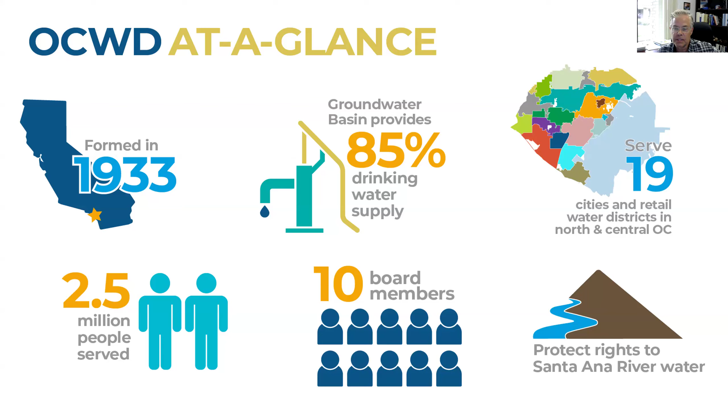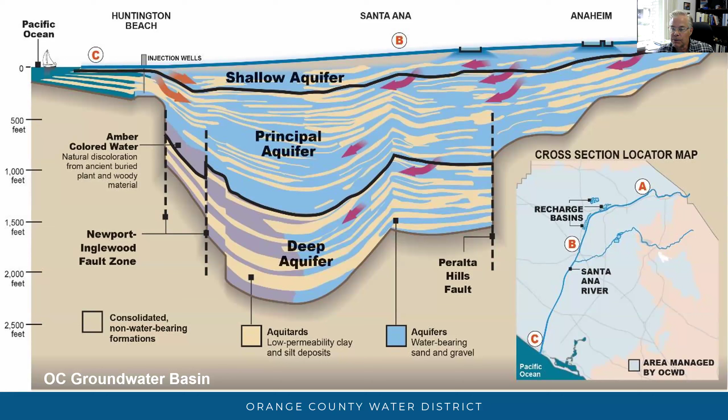We're blessed to have a huge underground aquifer in Orange County. It holds about 66 million acre-feet, but obviously we can't use all of that water. So we only use about 500,000 of that 66 million, and that's our operating range. We try and keep the groundwater basin relatively full in that range to avoid subsidence or seawater intrusion. It's just a big layer cake alluvial aquifer that you see in many places in California.

So a little bit about our infrastructure here in Orange County. At the far upper right, you see Prado Dam, a U.S. Army Corps of Engineers dam built in 1941. That's important for stormwater capture, and that stormwater is released downstream to our recharge basins, located in Anaheim, adjacent to the Santa Ana River, and in the river itself as well.

And then down toward the coast, we have our seawater intrusion barriers, two of them. The Talbert barrier is supplied with recycled water, 100% recycled water. That recycled water is also pumped up the red line, the pipeline that takes it up to our Anaheim recharge basin. So a very important source of water for us now.

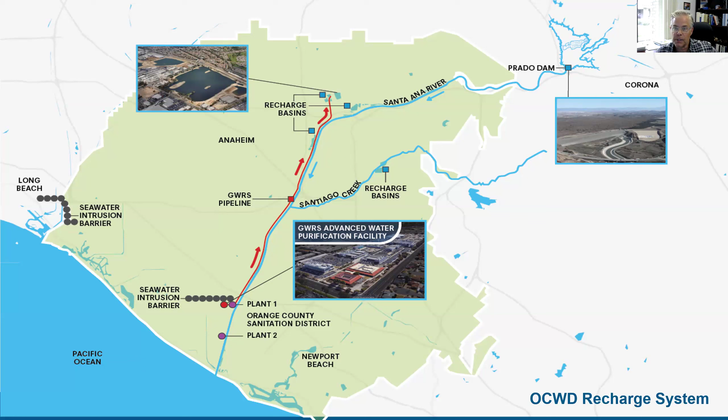So kind of drilling into our facilities up in Anaheim, we have 1,500 acres of land. We could not afford to buy this land today if we tried. That land was $27 an acre back in 1936, and now it's about $2 million an acre today. So we're really fortunate we started early.

And so we have more than 24 different facilities. What I want to draw your attention to in this graphic is that you can put our facilities into three different buckets. One bucket is surface water flow facilities where the water is constantly flowing, shaded in blue. That includes the main Santa Ana River and off-river channel basins. Then we have the green Santiago Basin and Burris, former gravel pits, which primarily just recharge water when they're full and not when they're empty.

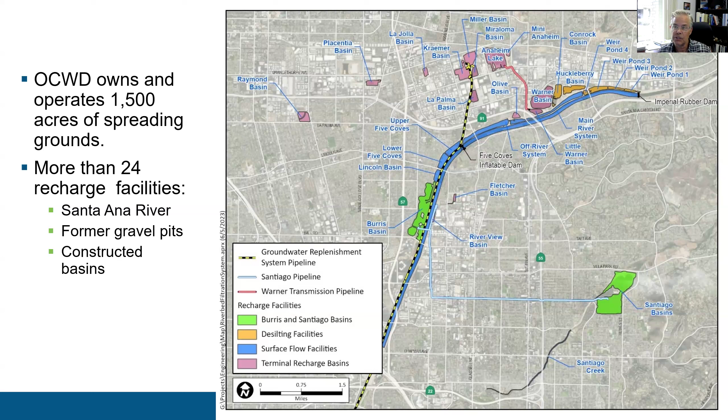So they're a different animal compared to the purple, which is really the focus of our talk today - what we call the terminal recharge basins. These basins are your typical recharge basin where the water comes in and then it just sits. And because the water sits, all the suspended sediment and solids in the water settle out on the bottom and clog. So these are really the facilities most prone to clogging, and of most interest in the study I'm presenting today.

So we have a pretty diverse water supply. As I mentioned, GWRS, the recycled water, is now our largest component of recharge to the groundwater basin. That's beautiful because 365 days a year, every day, we're getting that water in the ground. The base flow coming down the river is pretty consistent, natural recharge is consistent, but the storm flow is really the wild card. With changing weather patterns and everything, it's so important to make sure we can capture all that storm flow coming our way and not lose any of it to the ocean.

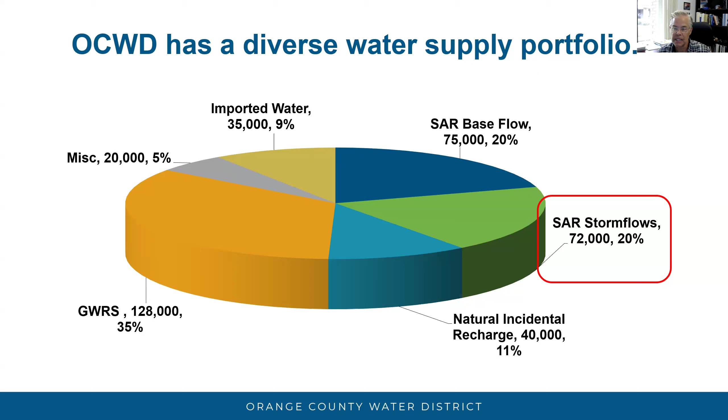So why are we doing this study? Well, all recharge facilities clog - that's a universal golden rule when it comes to MAR. It's all going to clog at some point, so you need to be ready for that or have steps to deal with it. For us, because we're adjacent to the Santa Ana River, we get a lot of suspended sediment that we bring into our system, tons per year, every year. It's really a key constraint on our ability to recharge water. And as I mentioned, land is $2 million an acre, so we want to make sure we can get the most out of every acre we have. That's really what's driving the research we're doing on clogging - can we increase our recharge capacity by reducing clogging?

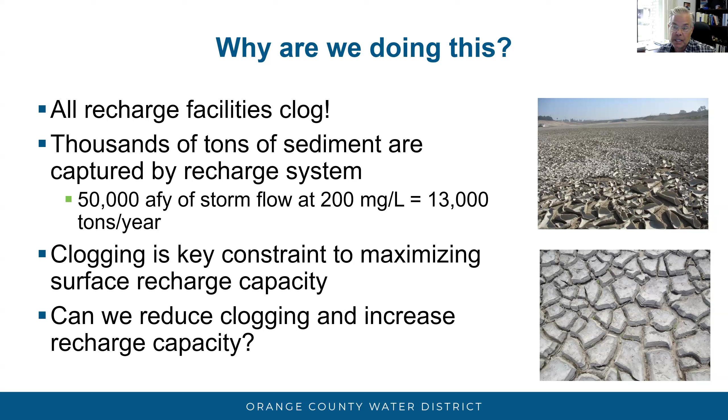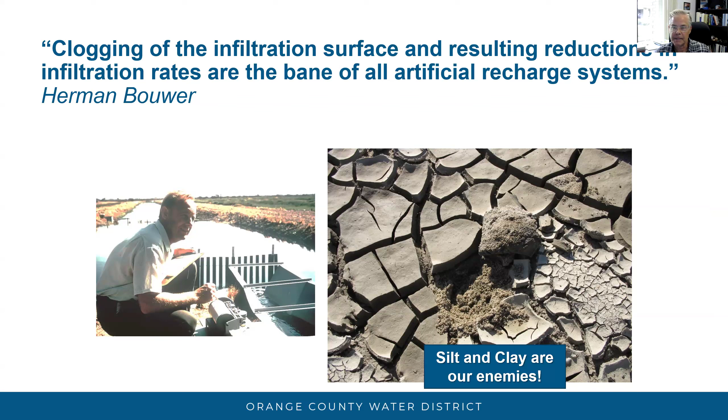That really drove the point home of how clogging is impacting this basin. If we can somehow clean up the river water and reduce the clogging potential of that source of water, we could potentially double the amount of water we can get into the ground. So that's a big driver for us to do this work and find out how we can do that.

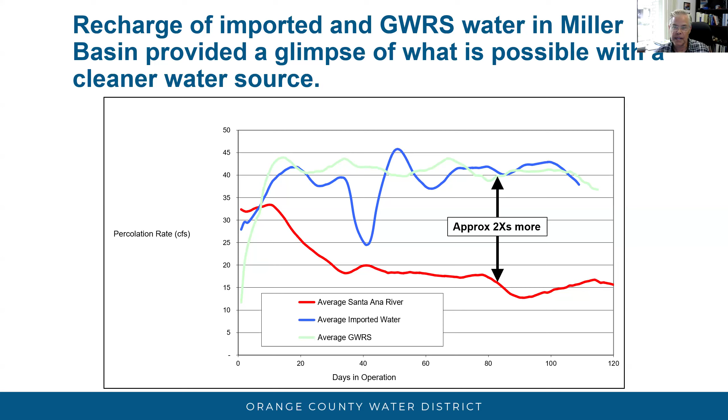What we found was really interesting and surprised the engineering community: any method that used a polymer, flocculant, or chemical pre-treatment to reduce the sediment load and get the sediment to drop out, even though it created water with low turbidity, once introduced into the concrete test cells, ended up clogging. We suspected that's because of carryover of chemicals, which started interacting with the native fine-grained materials in the sediment and created clogging.

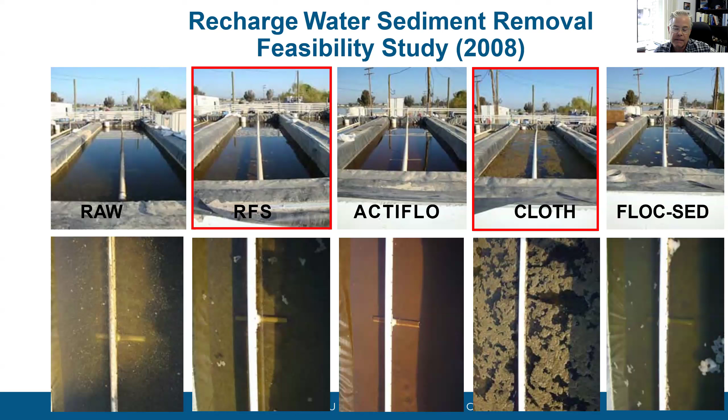But the two methods that did not cause clogging like that were riverbed filtration, or RFS, and cloth filtration, because we were able to use those two methods without any chemical pretreatment—just purely mechanical filtration with no chemical addition. That did result in increased percolation rates over the baseline. That was an important finding of this study, and I think it's really important to keep in mind as you look at strategies to reduce suspended sediments in your source water.

The cloth filtration we did on a small recharge basin for several years, and it was able to remove suspended solids, but the capacity of the cloth filter to remove sediment loads is pretty limited, in a finite range. So it didn't turn out to be very suitable for high levels of TSS—not really very useful in the broader scale in our system, not something we could scale up in a cost-effective manner. So we shut that system down and got rid of it.

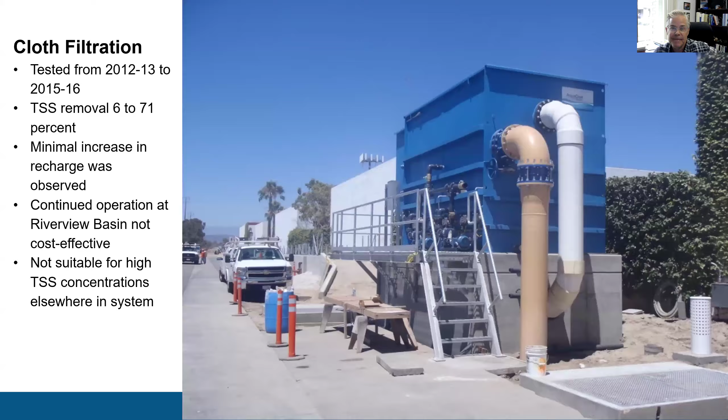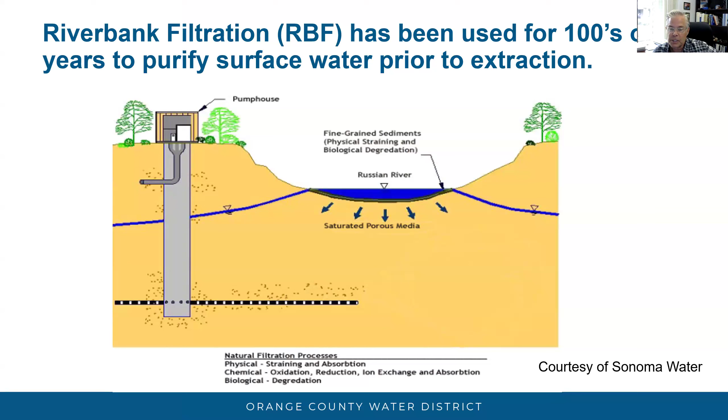So getting to what we're talking about today, riverbank filtration is kind of what we're doing, in a slightly different way. This technology has been used for years in Europe and all parts of the country. This graphic here is from Sonoma Water up on the Russian River—they have 9 of these riverbank filtration wells that they use for treating their water prior to use.

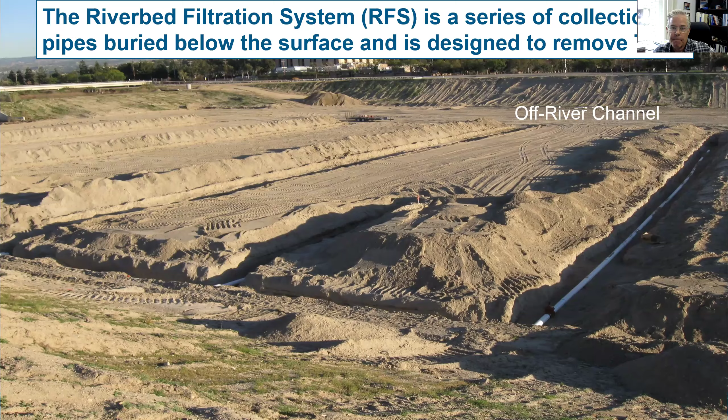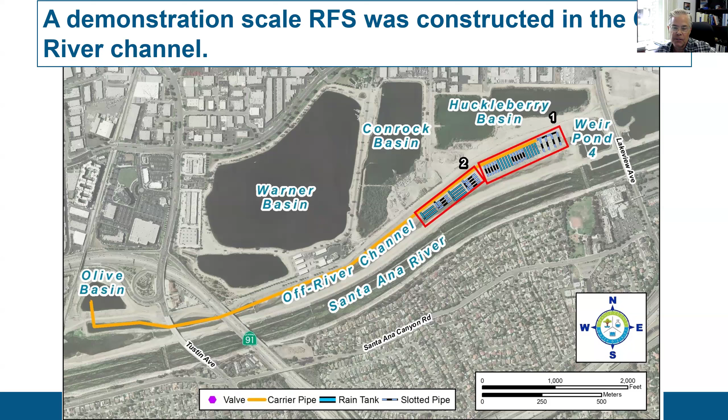The pilot system we built was expanded to a full-scale demonstration project. What you see in the red boxes are two sets of laterals that we built—I'll give you a more detailed graphic of that. These laterals cover about 10 acres and go into a dedicated supply pipeline, that orange pipeline, and then that water is conveyed to a downstream recharge basin called Olive Basin, which only gets filtered water from this project. This is the project we've been working on for about 8 years, testing it in all kinds of different configurations and modes to assess its long-term performance.

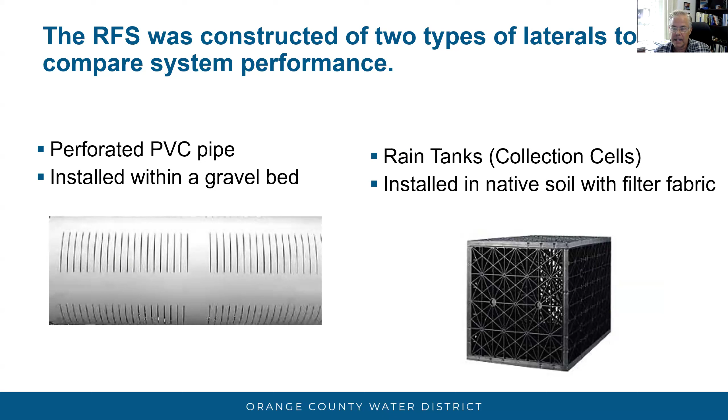As I mentioned, we used PVC pipe for the pilot, but we also used a different style of construction for the demonstration project called rain tanks. These are made by Atlantis. They're used a lot in the flood stormwater capture industry, underneath parking lots and other ways to capture stormwater. So we installed these to see if that would also provide a benefit in comparison to the PVC pipe.

Here's a picture of the rain tank being installed. You put them together, they're like Legos. You snap them together and then you wrap the geotextile fabric around them. They just serve as a conduit for water, just like the PVC pipe does.

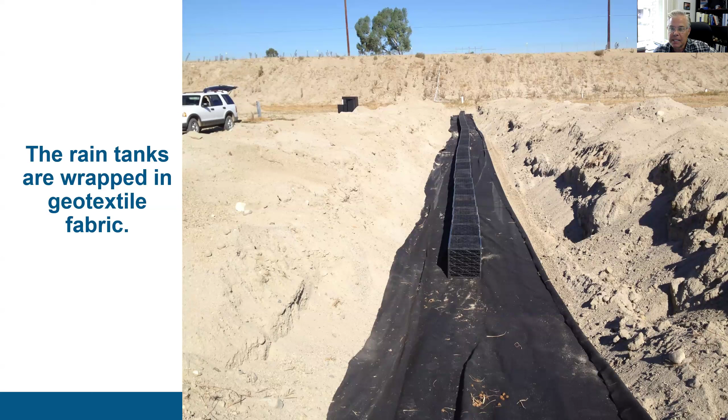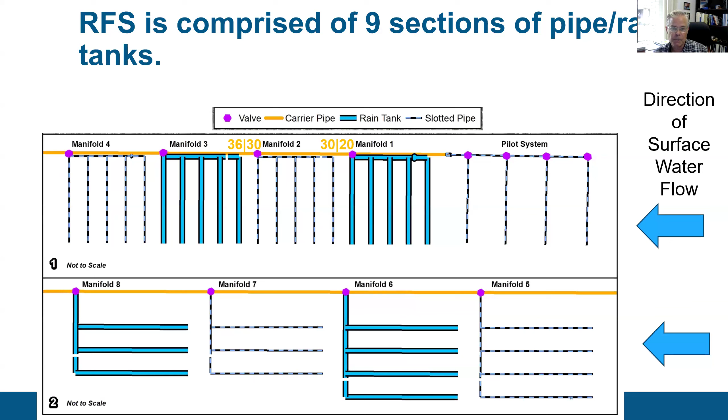We put together these series of manifolds with alternating types of material, the PVC pipe or the rain tank. We also looked at the orientation of these tanks to flow—does it make a difference if they're perpendicular to flow or parallel to flow? We were just trying to look at all the different perturbations we could make to assess future design parameters for this type of project.

I mentioned this filtered water was then fed into Olive Basin, and we also constructed a monitoring well near Olive to look at the water quality impacts of the water after it's already been filtered once. Do you see additional changes in water quality after it's recharged again?

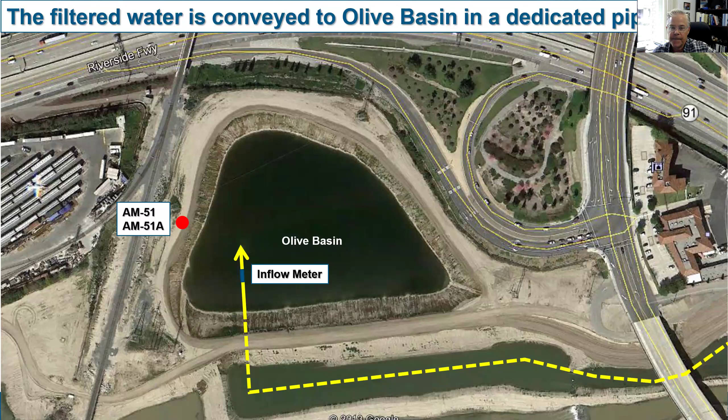So let's talk about the results. We've been testing for over 8 years, with a lot of performance and water quality testing we can present here today. I'm not going to go into the gory details, but just some of the highlights.

Olive Basin performed well from 2015 to 2023. I want to draw your attention to the bottom line, the percolation rate over time. Because of where the system is situated in our recharge system, it primarily receives floodwater, so it's mostly active in the wintertime. In the summertime, when we're down to base flows in the river, we're not able to supply water to the system. So it's somewhat erratic, which made interpretation of the results a little more challenging, but not impossible. That's why you see so much spikiness in the data, because of the supply constraints to the basin.

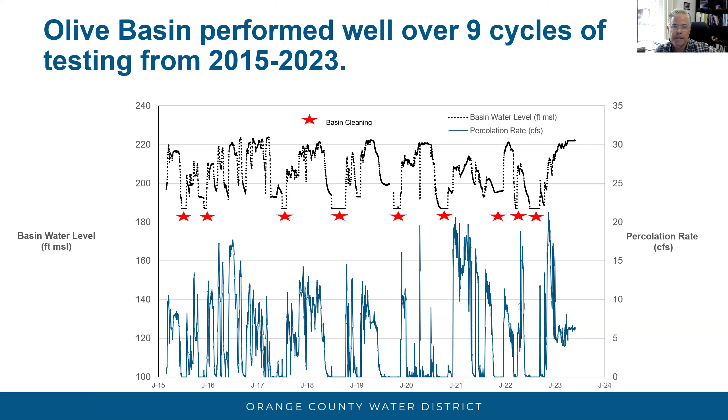Before I get into performance, other water quality improvements we saw were TOC and DOC removal of 50%, which is pretty consistent with the literature on soil aquifer treatment. What's really fascinating is you're talking about very quick travel time through the soil, on the order of 3 to 4 feet per day. So you can see that organics removal in MAR is very effective, despite the short travel time here.

Some of the CECs we saw removed showed a pretty typical removal pattern—some removed, some not removed. If you want more on that, you can read the final report, which I'll give you a link to at the end of this presentation.

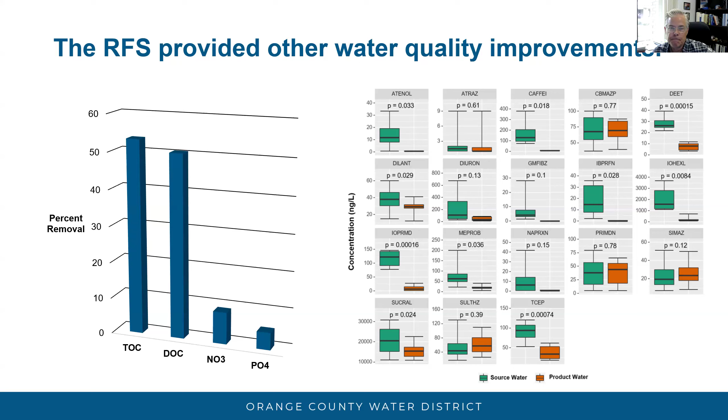So what did we get out of this? The red line on this graphic is the performance of Olive Basin with unfiltered river water—that's what it would do typically on average. You can see it would fill up and clog pretty quickly, just like Miller Basin that I showed you earlier. All those other lines are the riverbed filtration percolation rates over time, and you can see we got much higher rates, up in the 20 CFS range. For a long period of time, we can go a year between cleanings, whereas with unfiltered water, you'd have to clean it after just 3 or 4 months of operation.

So how do we interpret these data? What I did was take a graphic and said, okay, over a 500-day period, how many times would I have to clean the basin using unfiltered water? That's the red line you see there, showing the river water cleaning period—there are 4 cycles of operation shown with unfiltered river water. Then I took the long period of time we had for several of the runs and tried to project what the clogging would have been if we'd had a constant supply of water to the basin for that time period. That's what the dashed line shows you.

If you look at the volume under the curve, the red dashed line, that's what's in the box in the upper left corner. With unfiltered river water, you're getting about 5,500 acre-feet over that time period. With riverbed filtration, based on the projection, you're getting more than double that volume. This matches up really well with what we saw in Miller Basin on that slide I showed you earlier. It's nice to see a repeat of that doubling of recharge capacity using a different source of water in a different basin, and it gives us a lot of confidence that this is a real benefit achievable on a bigger scale.

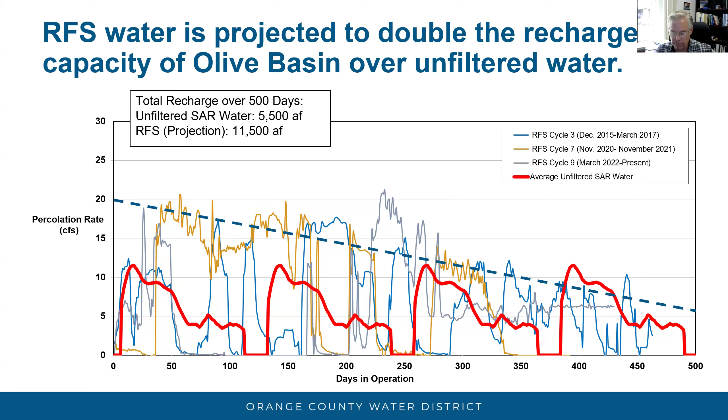Just some other performance metrics I wanted to mention: we did not see any difference between the slotted PVC pipe versus the rain tank in terms of volume or performance over time, so it's really a wash. The orientation of the lateral didn't make any difference, whether parallel or perpendicular to flow. We also did not see any long-term performance decline. Some people were concerned that suspended sediments might get bound up in the riverbed sediment and not get cleaned or washed away, but because there's always surface flow going over the top, the surface stayed pretty clean.

We did notice a decline in per-lateral performance when all laterals were open. That meant some laterals were too close together, and when everything is open, you start to cannibalize the performance of the nearby laterals. So spacing turned out to be pretty important. You can put them too close together and still get the same overall flow rate, but per-lateral performance suffers. There's probably some optimization that could be done to make sure laterals are spaced at the right distance apart so you're not overbuilding the system.

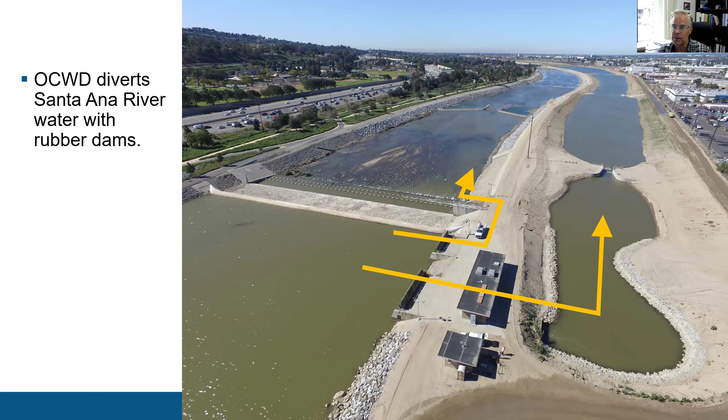I show you this because the big idea is to divert water in a different way. This graphic shows what we're currently doing: Santa Ana River water comes down, we've got a rubber dam, we stop the flow, and divert it to recharge basins or back into the river downstream. That's our current operation.

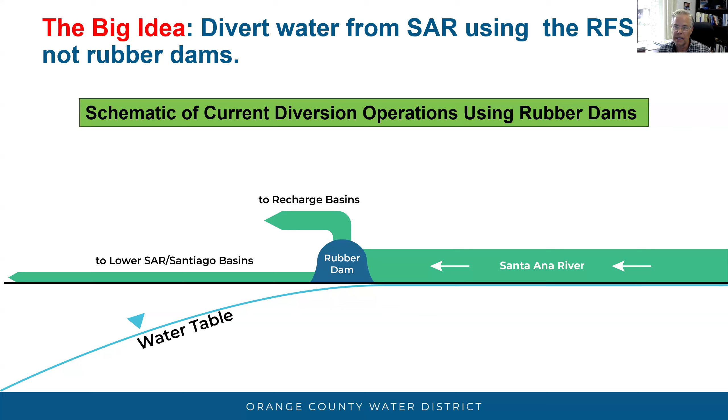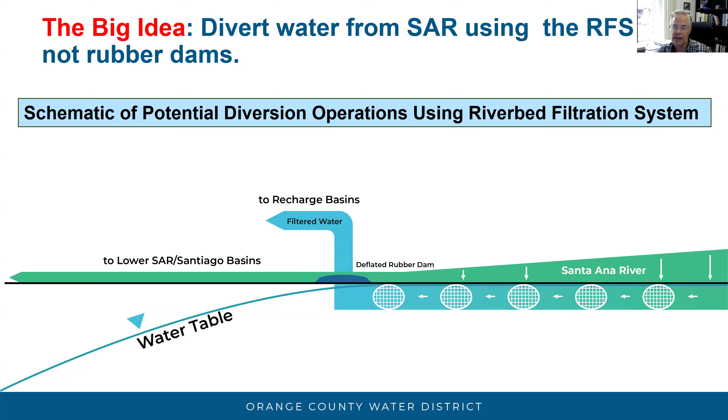The vision of using riverbed filtration is to put the riverbed filtration system under the river and divert the filtered water off the river, leaving the unfiltered water in the river to go downstream. So rather than diverting on top above, you're diverting below. By doing that, you take advantage of the filtration properties of the riverbed and that filtered water, increasing your recharge capacity. That's the big idea—hopefully that graphic simplifies the concept.

One thing we have to consider in our case is that we have a pipeline connecting these offstream basins to the river, called the Warner Transmission Pipeline. Right now that pipeline's capacity is fine, but if we purify the water and make it cleaner, there's going to be greater downstream capacity than currently exists, so we may need to look at potentially upsizing that pipeline to account for the cleaner water we might have in the future.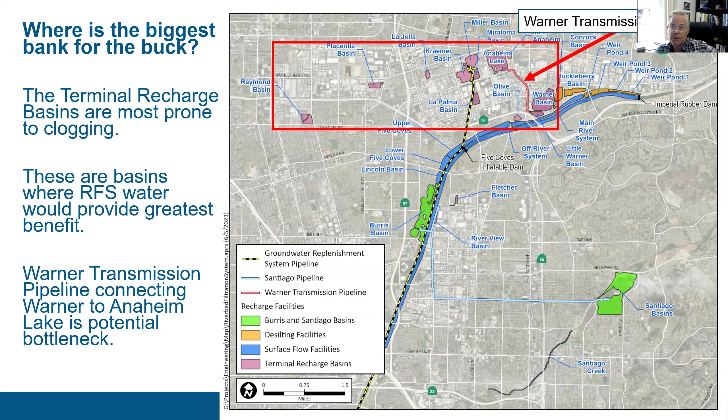So here's the picture of the recharge basin, Terminal 1, the Anaheim Lake, Miller, Kraemer. These are the basins that we're targeting for this riverbed filtration system.

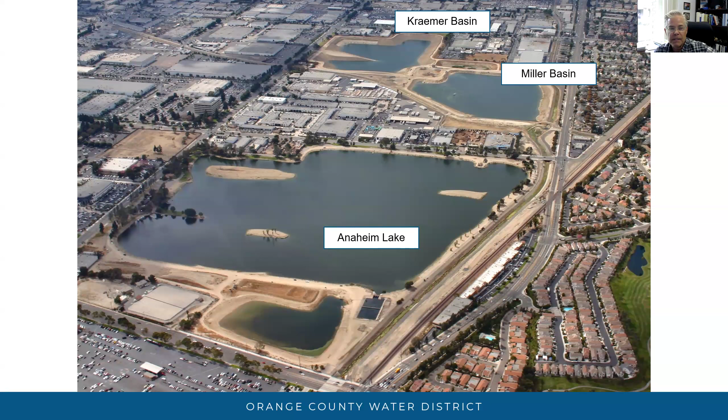Now, to analyze the potential yield we might get, we used a recharge facilities model that was developed in 2009 using GoldSim software. It's a really great model, great tool that we've used for a lot of planning exercises over the years. And the secret sauce behind this model is it includes a percolation decay equation that we've developed for our facilities based on a lot of research that we've done.

So every basin in the model has its own percolation decay equation. Some of them are similar, but some are unique and calibrated to that particular basin. And that's really what makes the model work. We're able to calibrate the model because we have those equations built in. So very useful, very handy, but really important to account for clogging if it's going to be an accurate model.

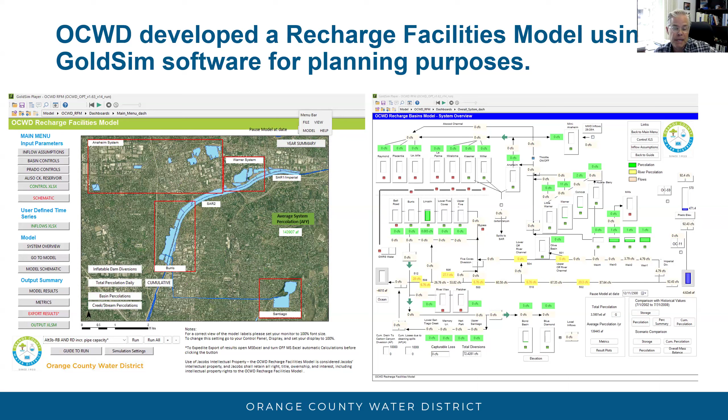So using this model, we said, okay, what if we had no clogging in those downstream basins? What could we get out of it? And this is what we came up with.

If you see the graphic there is the total annual recharge with no riverbed, that's the baseline. And then if you put in the riverbed filtration, and then riverbed filtration with increasing the Warner transmission pipeline diameter or capacity. The one on the right is really the more interesting one. That's the average annual increase that you would get from the project.

So you can see with riverbed filtration, we're looking at about 7,000 acre-feet per year. And if you increase the pipeline, it's another 2,000 acre-feet per year.

To put this in context for people, the value of water in Orange County is really based on the alternative source of water that we can buy, and that is imported water. In round numbers, we use $1,000 an acre-foot as the value of imported water. So if we lose water to the ocean, that water, if we can get it into the ground, the value of that water is really $1,000 an acre-foot because our producers would have to purchase that water to offset the decreased amount of groundwater they can pump.

So the more groundwater you provide, that offsets imported water on a one-for-one basis. So this project here, riverbed filtration, that's $7 million worth of water a year. That's a pretty high value there. So that's a useful metric that we have here in Orange County to do our cost-benefit analysis, as we know that the value of imported water is $1,000 an acre-foot. So anything we can do to get water in the ground that's lower than that is probably going to be a good project.

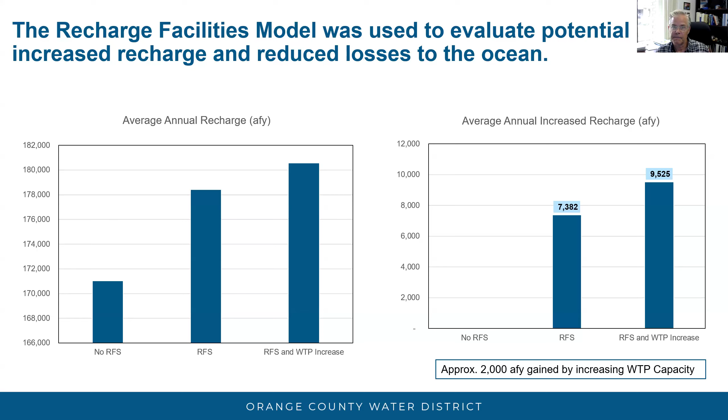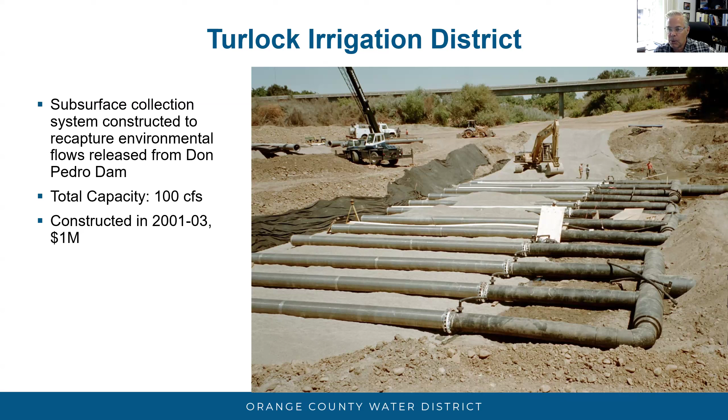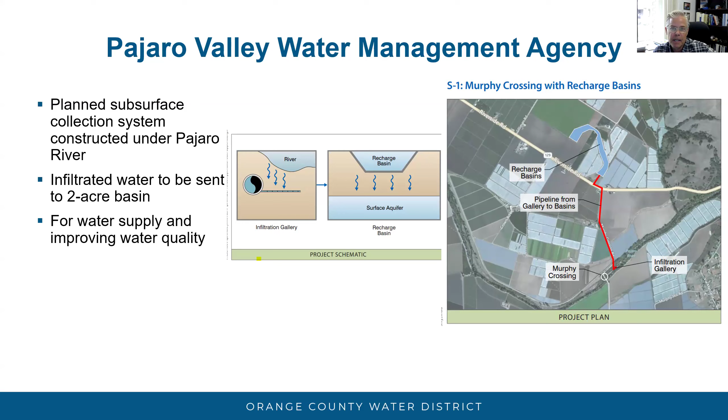The Pajaro Valley Water Management Agency has a project like this in their planning documents where they want to capture water from the Pajaro River and send it to a recharge basin. So this is just conceptual on their end, but it shows that other people are thinking of using this technology. The last example I want to show you is interesting.

This is the South Valley Water Resources Authority, a JPA. This JPA is really focused on trying to get water out of the Delta. They actually want to use this technology as a glorified fish screen, basically, just to allow them to take a lot of water out of the system without hurting fish. So that's another application of the subsurface recharge technology. I thought that was pretty interesting. And theirs is huge—they want to build it up to 15,000 CFS, so pretty big.

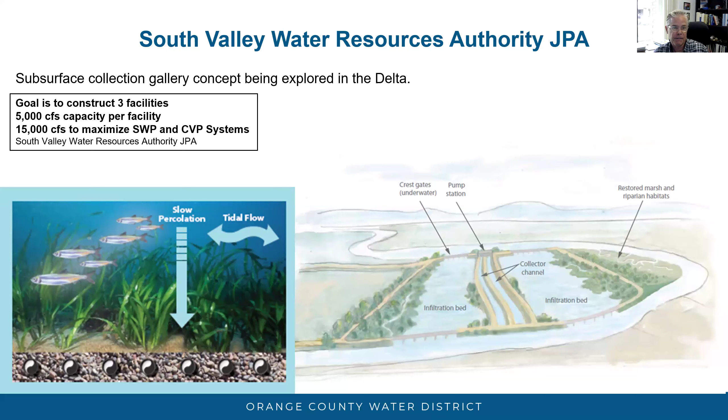So to kind of summarize, the riverbed filtration provides multiple benefits. It obviously will increase our recharge. And the filtered water that we get can mix with other clean water sources that we have available, such as our recycled water and imported water, so we can mix those together without causing clogging.

If we mix river water with the clean sources of water, it would pretty much contaminate that clean source, and it clogs the basin just as if there was no clean water mixed in with it. So having the cleaner water source would give us a lot more freedom to recharge the cleaner sources.

We can divert the water when the rubber dams are deflated. One of the beauties of the system is underneath the channel, our rubber dams have to be deflated when the flows are about 1,000 cubic feet per second. This system here doesn't care if that flow is 1,000 cubic feet per second or 5,000, it's still going to be diverting water off the river. So that's a real benefit as well.

It will reduce the number of basin cleanings that are required. You're going to have less wear and tear on your equipment, less labor requirement, because now you're getting longer run times in your basins. So that's really a great benefit.

When you think about the big picture, in other areas like what they do in the Tuolumne River, this represents a technology that could be used to less invasively divert water off of rivers for recharge purposes. A rubber dam is pretty disruptive to the environment. Fortunately, we don't have fish or other things in our area, but if you do have fish and other environmental concerns, this is a real good technology that could be used to divert water under the surface without disrupting the habitat above.

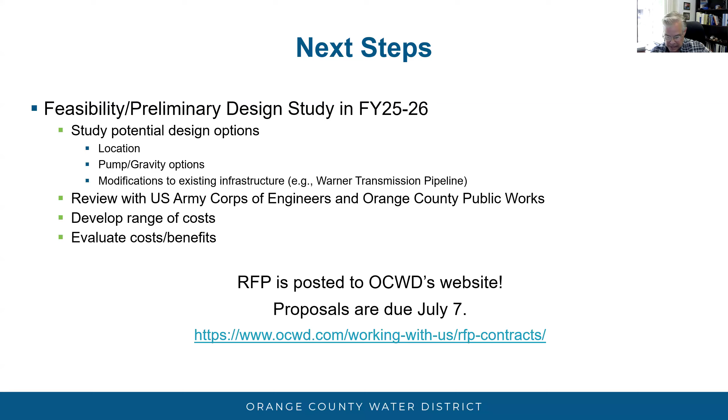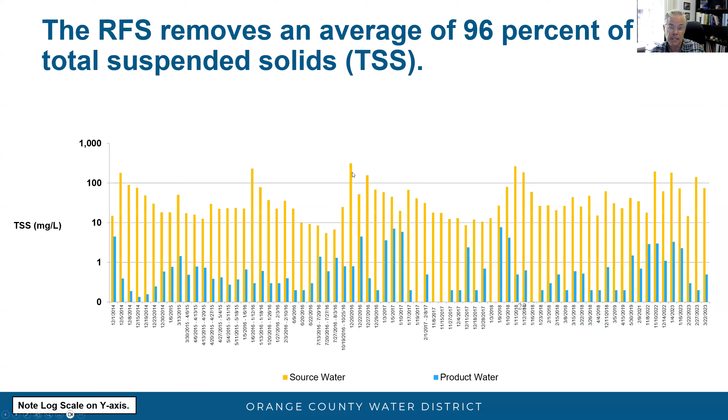It's already receiving water that's been through some weir ponds, so it's had some sediment removal. So what if it was in the main river where there is no removal? You're just getting raw, unfiltered, untreated water. So we did that, and what you see here is our operator building a mini version of the Riverbed Filtration System in the live river channel.

We had a pump in that system, and we waited for a big storm event to come through so we could sample the surface water and the water coming out of the system at the same time, to see if there was a threshold at which, if the TSS was too high, the system would fail. What we found is it did not fail. Even with high loading, and I don't have the numbers off the top of my head, the data is in the report. It shows that even at higher loading rates than we saw in the pilot demonstration project, riverbed filtration technology worked admirably even at really high loading rates.

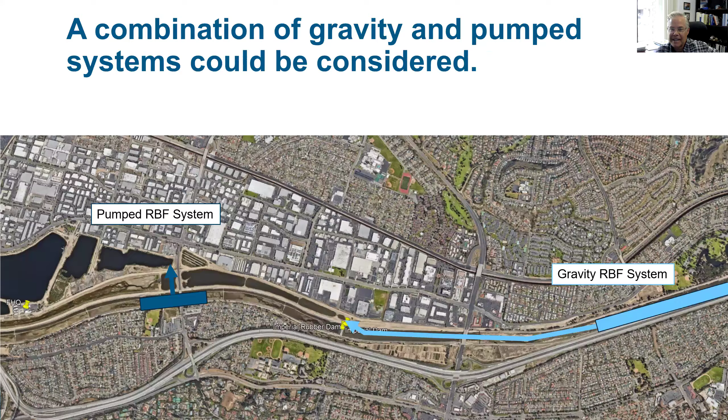Camille was giving lots of comments and hand claps on an excellent presentation. I also really appreciated, Adam, the visuals and imagery that helped me conceptualize what you were talking about. I'm probably the least informed of anyone participating in the LunchMAR sessions, so thank you for such a great presentation.

Camille was asking, does this tick off one of the research and data development plan recommendations? Folks know what Camille is talking about, the R&DD plan. I'm not sure, it's a good question. Is that the DWR R&D plan? We have Camille here, did you want to come off mute and say more about that?

Hello everyone, thanks Adam, great presentation. A number of years ago, as the network was coming together, at the inception of the network, 200 some experts put together a research and data development plan to leverage and improve MAR in California. About 39 recommendations covering 13 different disciplines or areas, one of which was water quality, is in that plan. At the forum this fall there's going to be an update on what's been accomplished and what more needs to be done on those recommendations.